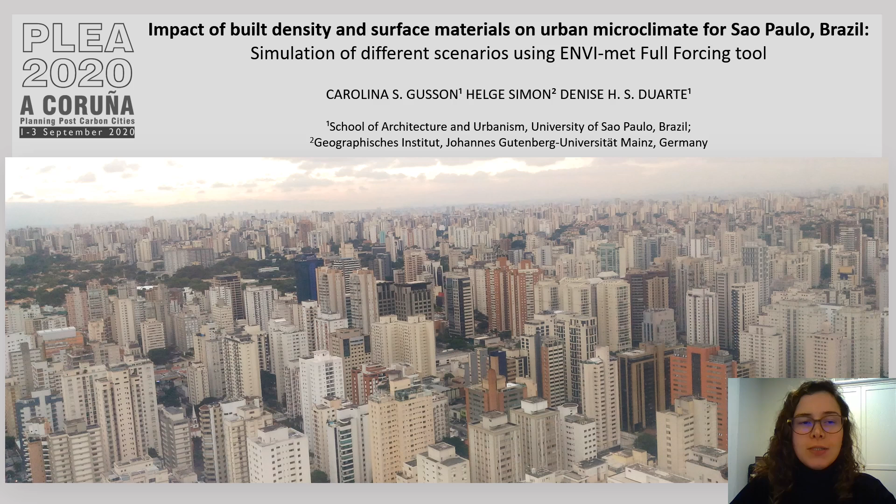My name is Carolina Gusson. I am an architect and urban planner and a PhD from the School of Architecture and Urbanism of the University of São Paulo, Brazil. First, I would like to show you why we are interested in studying this topic. Then, I will show you how we did the study, the field campaign, the calibration, and the scenario simulations. Then, the results, and finally, the conclusions.

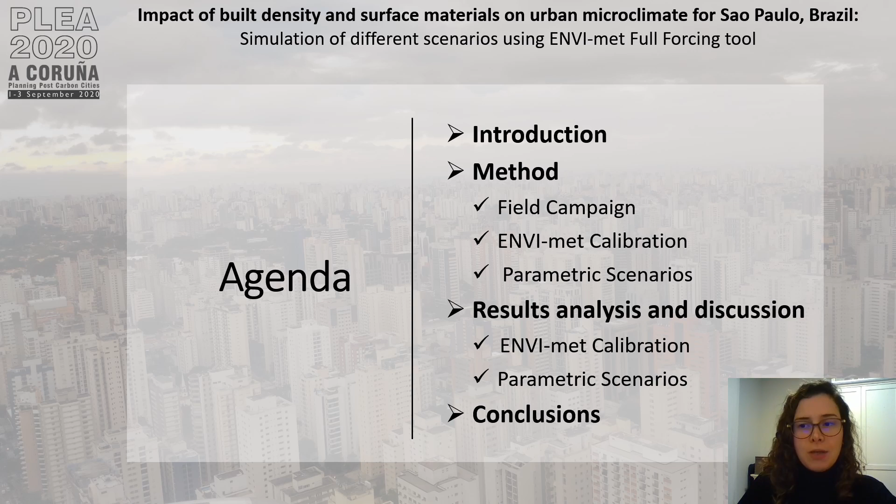This research has two approaches: measurement and simulation, and how to combine them to achieve more accurate results. In recent years, urbanization has been particularly great in tropical climates and is likely to even increase. The climatic problems in Brazilian cities today are showcases to other developing urban areas in tropical climates. São Paulo is the fourth urbanized region in the world with the largest population, of around 21 million inhabitants, and it's characterized by a humid subtropical climate.

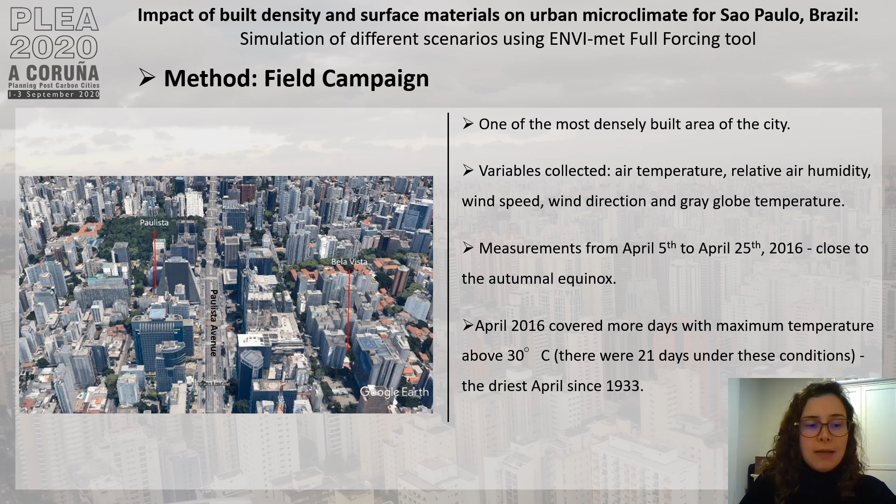São Paulo urban area is very heterogeneous, so it's important to do measurements and model calibration in the study interest area before going to parametric simulations. A field campaign was undertaken in 2 points of the most densely built area of the city. The variables collected were air temperature, relative air humidity, wind speed, wind direction, and gray globe temperature. The measurements were taken from April 5th to April 25th, 2016. April 2016 covered significantly more days with maximum temperature above 30 degrees than the long-term average.

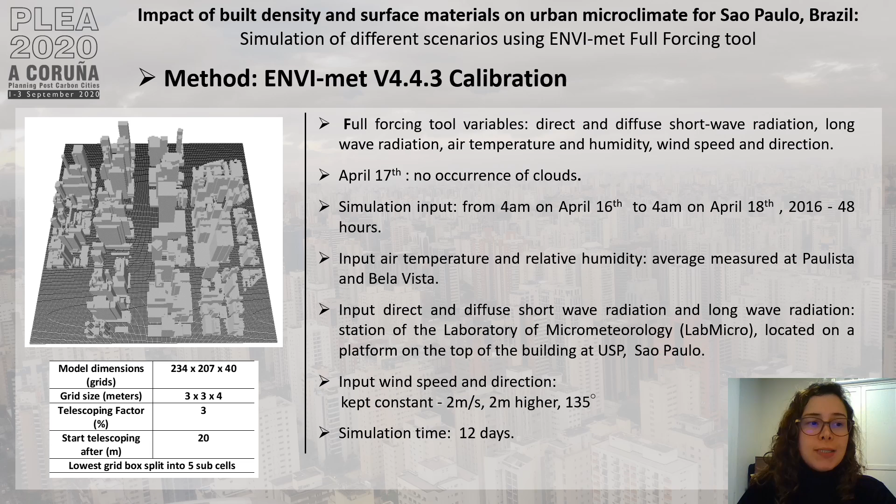The variables required for the full forcing tool are direct and diffuse short-wave radiation, long-wave radiation, air temperature and humidity, wind speed, and direction. The simulation input data were from April 16th to April 18th, considering that April 17 had no occurrence of clouds, resulting in a 48-hour simulation. The input data for air temperature and relative humidity were obtained from the average values measured at the 2 points. The direct and diffuse shortwave radiation and long-wave radiation were recorded by a fixed platform on the top of a building. As the wind speed in the measurement area is very low, it was decided to maintain the input wind speed and direction constant. The simulation took 12 days.

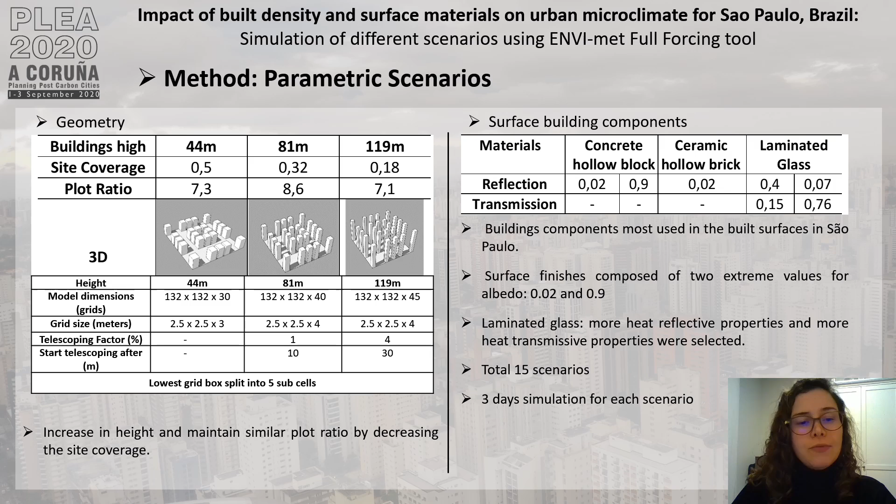15 different parametric scenarios were generated combining 3 different heights of tower blocks with 5 different surface building components. The building scenarios increase in height and maintain similar plot ratio by decreasing the site coverage. All the 3 building scenarios should have a plot ratio like the field campaign areas. The building components are the concrete hollow block, the ceramic hollow brick, and the laminated glass. The surface finishes are composed of 2 extreme values of albedo. 0.02 represents a black surface and 0.9 a white one. And for laminated glass, one more heat reflective and another more heat transmissive. Each simulation took 3 days.

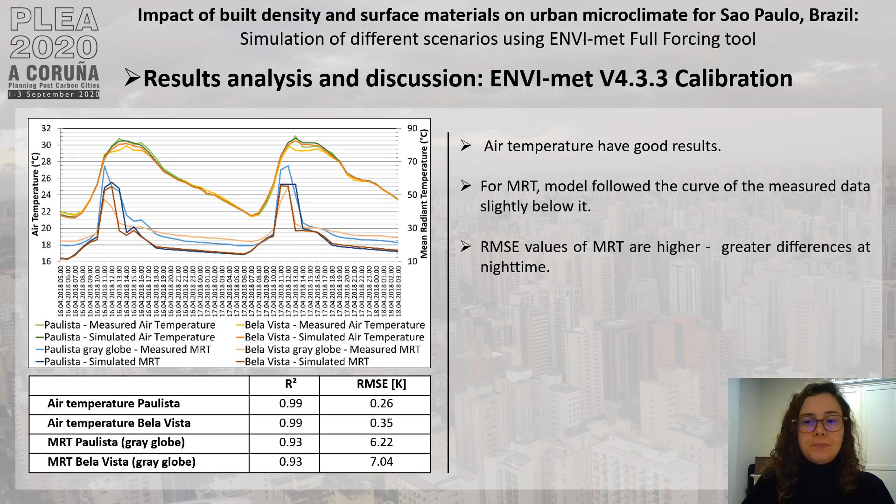For the results, we'll consider the values of mean radiant temperature and temperature of equivalent perception outdoors at the pedestrian level at 12 p.m. TEP is a thermal index developed for local conditions. The 81-meter high scenarios and the east-to-west axis present the best results due to the shading effect. Average difference is around 11.6 Kelvin for MRT between axes and 2.4 Kelvin for MRT between heights. At night, the building geometry had a small influence on MRT and TEP because of their close ranges of built volume and plot ratio.

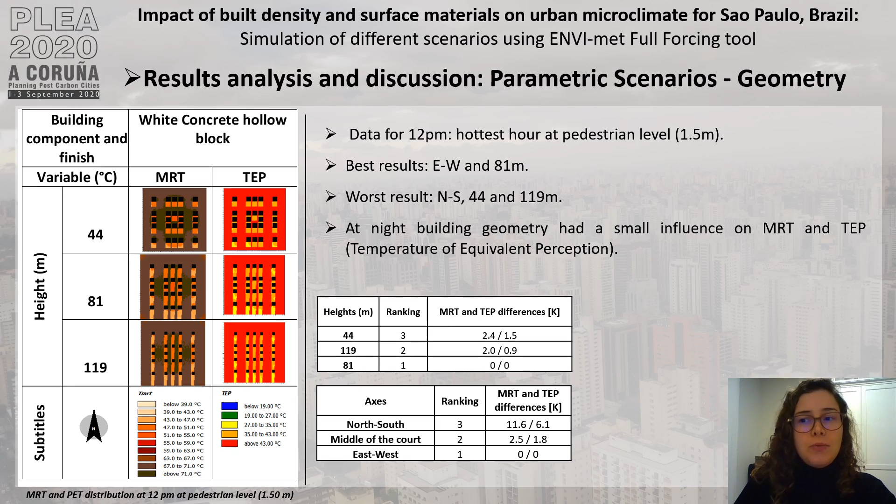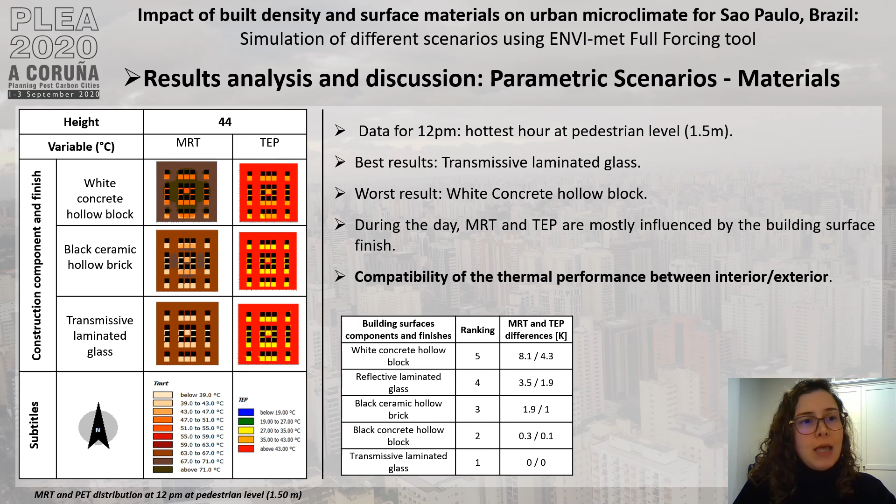Consider building surface components and finish behavior for 12 pm. Transmissive laminated glass had lower MRT and TEP values, whereas the white concrete hollow block resulted in higher values with average increase of 8.1 Kelvin in MRT over the laminated transmissive glass. At night, the highest MRT and TEP were found on the concrete hollow block with a black finish, with an average increase of 3.9 Kelvin in the MRT compared to transmissive laminated glass. MRT and TEP are higher in scenarios with components that store more heat. It's important to seek compatibility to the best thermal performance between day-night and interior-exterior.

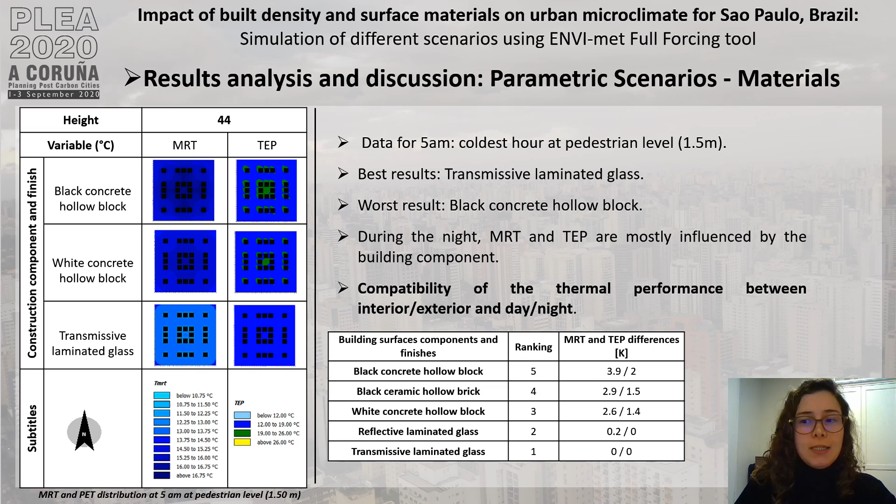ENVI-met presents good statistical results in calibration despite underestimating the MRT at night. The combination effect of geometry, building components, and surface finishes generates a daytime difference between the scenarios up to 22.1 Kelvin in MRT and 11.9 Kelvin in TEP. During nighttime, differences were of at least 4.1 Kelvin in MRT and 2.7 Kelvin in TEP. Site coverage and height were the dominant factors that most influenced the microclimate during daytime, improving shade and ventilation.

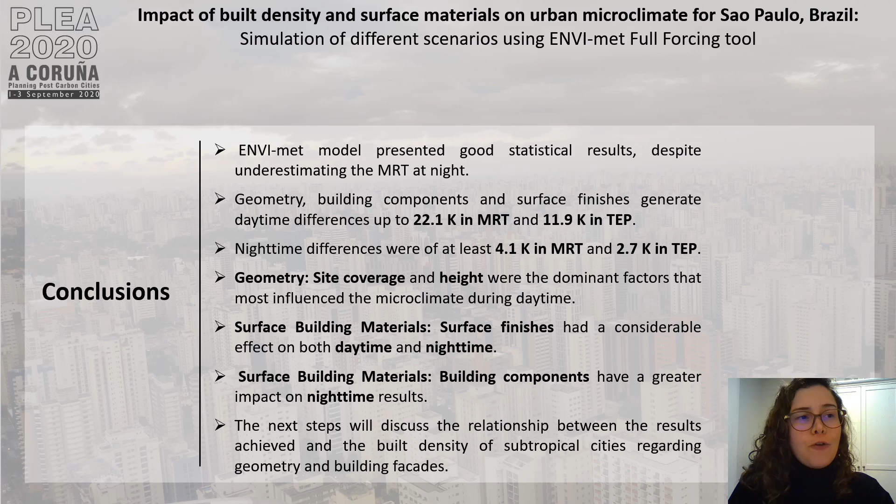In the daytime, the surface finish influenced both the inside and the outside of buildings. The reflective finish causes discomfort for pedestrians in open space, but it can improve conditions in indoor space, whereas darker finish improves conditions in open space, but can contribute to the air temperature increase inside the building. The building components have a great impact on the nighttime thermal comfort in the urban environment due to their heat storage properties. The next steps will discuss the relationship between the results and the built density of subtropical cities regarding geometry and building facades.